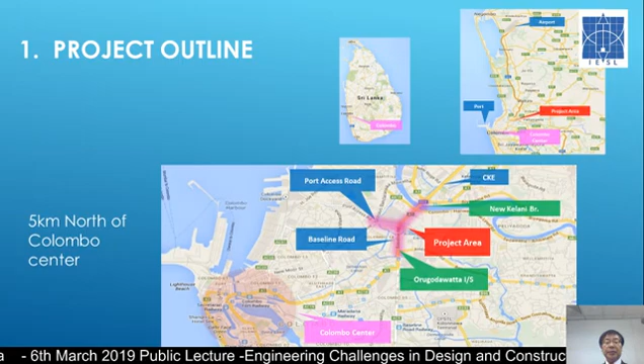The project outline, I don't think I need to explain in detail. It is about 5 kilometers north of Colombo Center. The bridge is crossing over the Kelani River. The baseline and port access road where our project is located has heavy traffic with 86,000 or 27,000 vehicles, especially after the opening of the Colombo-Katunayake Expressway between the airport and Colombo.

Further, as you may know, the port access elevated highway bridge, which connects from our project to the port, is now being implemented, and in addition, the extension from Orugodawatta to Rajagiriya and then to Battaramulla, finally connecting to the OCH, is proposed.

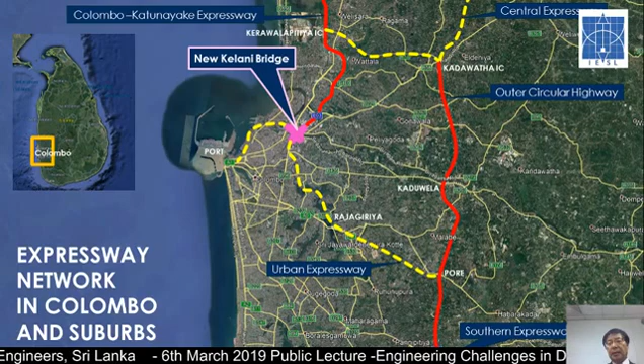So this is the expressway network. The pink one is our new Kelani Bridge project, and the red one is the expressway already in service, and the yellow one is under construction or under planning. Our project is located at the core of this connection point, which becomes a node of this expressway. This becomes a network when it is completed.

There are two packages for this project. The blue one shows package 1, which is mainly built for steel bridges, constructed over the existing bridges and existing road, over the baseline road as well as the port access road.

Whereas the red part, which is package 2, is parallel to the existing road connecting to the CKE. It's diverting from the CKE endpoint and connecting. In the middle there's a junction, a loop, that diverts the traffic to the port as well as to the baseline.

So this is package 1. It shows the number of piers. We have 70 steel piers and 28 concrete piers.

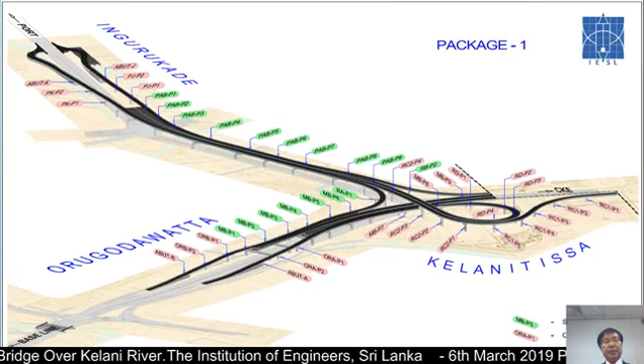As I mentioned, all the structures are built over the existing road, and those are made of steel. The reason we use steel is accelerated construction compared to concrete structures, because of the heavy traffic, we have to minimize the impact to the existing traffic. Steel erection is very fast and has less impact on existing road traffic.

Package 1 was awarded in December 2017 to the contractor JMT, standing for the JFE, Mitsui, and Toda JV. The construction period is 36 months, which contains fabrication of steel, erection of steel, as well as erection.

For package 2, as I said, it is parallel to the existing road, and is made of concrete, in contrast. At the center, you see the Extradosed bridge, a cable-supported structure being built in this country for the first time. On the right side, it connects to the CKE by pre-stressed concrete, post-tensioned box girders. On the left side, it is also made of steel-concrete, pre-stressed concrete bridges. Those are all box girders.

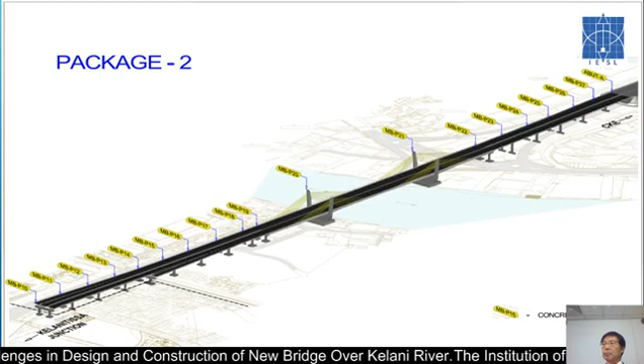This package is awarded to the SMCC Sanken JV. The construction period is almost similar to package 1, starting 2 months earlier, from October 2017 until 2020. It contains construction of concrete bridges as well as soft ground treatment for the bypass and connection parts.

Before going into the technical challenges, I would like to mention other difficulties that especially the PMU, or the RDA, was tackling and successfully solved. Relocation of residential houses, amounting to 377, were inside the right-of-way and had to be relocated, either to the Saramura housing area or through self-relocation.

Also, the Atomic Energy Board building, the NAITA building, was inside the junction area and had to be shifted or moved somewhere. Also, the high tension cables, overhead cables, pylons, piers and towers crossing our project area were a huge problem. But successfully, last month I think, all the cables and overhead cables were removed.

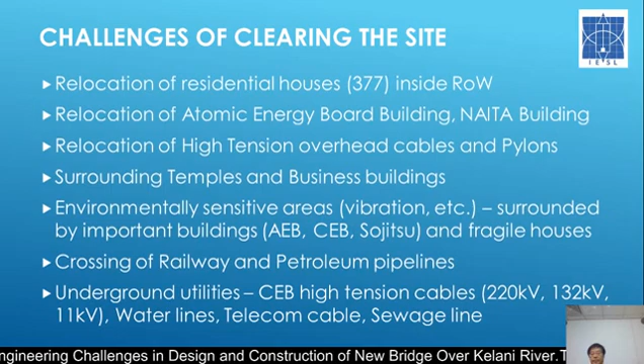However, in construction, the contractor has to excavate all the foundation areas manually as a pilot excavation to see whether utilities are there. There were many unknown utilities found, and they had to be relocated, which took a lot of time, not only for the contractor but the employer, asking the utility owners to shift or move them. Also, protection of the utilities is always mandatory, to not damage the utility lines.

Now going to the design. Since it is built in this country, the primary standard for the road is the RDA standard. Also, for structural design, Sri Lanka basically uses the British standard 5400. But those are not enough for designing the bridges, so we use several Japanese standards which are more applicable, and also American standards. So it's a combined use of different standards, but primarily the BS 5400 was used.

The design condition, briefly talking about this project: the design speed is 60 kilometers for the normal main line, but 40 kilometers for the ramp—ramp meaning a connecting road. We have to consider dead load, which is the self-weight of the structure, also the superimposed dead load, which is asphalt pavement and everything loaded after the bridge is connected. Live load is vehicle loading, composed of uniform loading as well as truck loading.

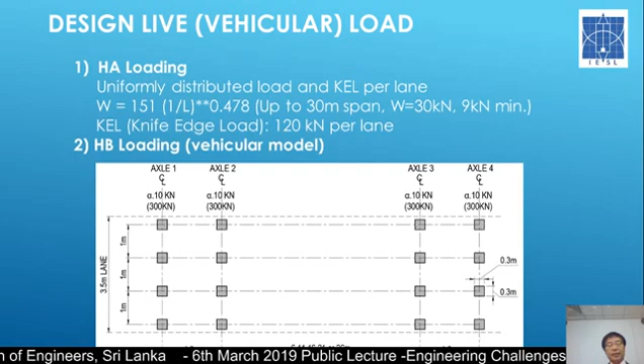The design live load - if you're a civil engineer, you might know there are two types of loading. HA loading, which is a uniform distributed load applied on the lane. But in addition, there is HB loading, which is like a truck - not exactly a truck, but a motor-like vehicle with 4 axles - so that truck load is also applied on the structures.

Now finished with the loads, and now I'm talking about the materials. Concrete - we have used up to 50 megapascal concrete, which is used for the PC pre-stressed post-tension girders, as well as pylons, where the forces and stresses are higher. But for the others, we use 40 megapascal concrete.

For cement, we use fly ash contained cement, which is low heat and also has long-term durability. We use the permanent fly ash contained cement. But we also use OPC, ordinary Portland cement, for the structure used for the superstructure.

Rebar, grade 460, maximum diameter 40 millimeters. Pre-stressing steel, which is Japanese standard, 15.2 millimeter 7-wire strand. Stay cables, which I'm going to discuss later, are a very high durable stay cable protected by epoxy.

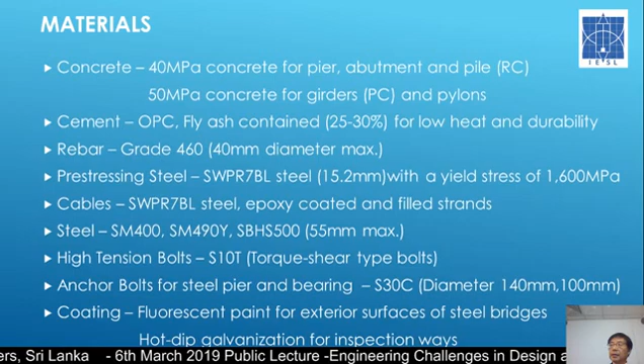For the steel used for the steel bridges, there are several kinds of steel, and the maximum thickness is 55 millimeters. The connection uses high tension bolts. And for the coating, as I said, this is a very high durable coating using fluorescent paint, and we also use hot dip galvanized for the miscellaneous structure.

Coating - there are coatings used for the exterior, interior, or the joint, depending on the location, so the coating system differs. But the most exterior surface, which has to be protected from the weather and atmosphere, uses what we call the C5 coating system, which again is being used for the first time in this country.

At the mill shop, for the plates, they have inorganic zinc primer, but at the fabricator's shop, they have first inorganic zinc paint, epoxy resin, and fluorine resin. The total thickness is 250 micrometers, which is 0.25 millimeters - quite thick.

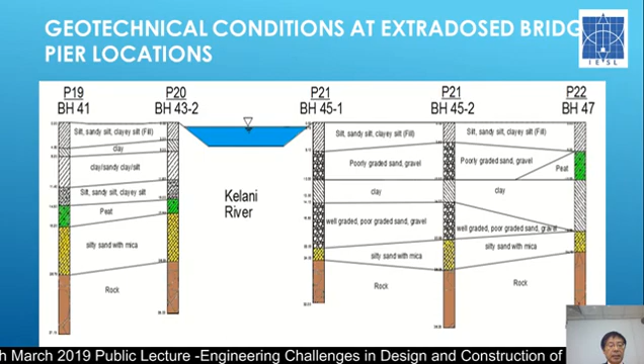Now for the geotechnical conditions - I think you already know that in this area there are some weak soils, so to speak, silt and also peat. In this picture, the green one and the yellow-green one represent peat, which is very soft and has high water content.

So for the foundation, we are driving into the rock. However, the rock has several degrees of weathering - 1, 2, 3, 4 - and so we are penetrating into the rock at least 1D diameter of the pile, checking the rock integrity. So the piles are all driven into the rock. The length of the piles depends on the site, but it is in the order of 20 to 25 meters, and bored piles are constructed to these depths.

Now for the main bridge - I will explain this later - the main bridge is an Extradosed bridge, built right next to the existing concrete bridge, spanning over the Kelani River. Both foundations are located outside the river.

This is a PC pre-stressed post-tension box girder, and the box girder is to be erected by scaffolding. The lengths of the box girders range from about 165 to 260 meters, all spans in a 4 or 6 span continuous bridge. The girder is made of units, either monocell or two-cell structures, depending on the width of the girder.

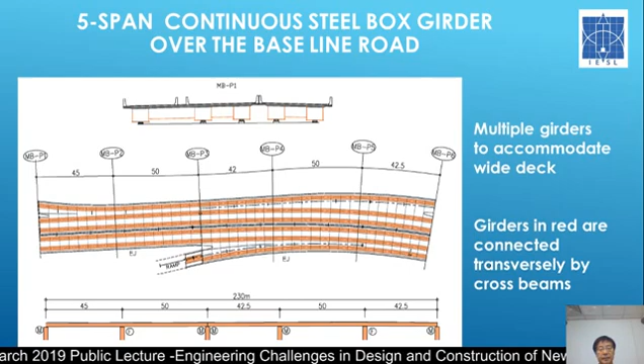Here we show that the red lines indicate the steel girders, and the multiple girders are connected to each other by the cross beam. Because of the width changes due to the connecting ramp, in order to accommodate the width, the number of girders varies.

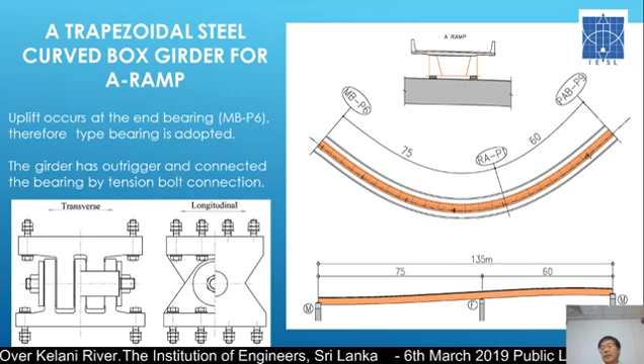And this is a curved bridge. We have a lot of curved bridges because of the ramp, and this is one of the sharpest curved bridges connecting between the main line.

So this is a 2-span bridge, and the span length is not symmetrical. Therefore, when the dead load, self weight, as well as live load is applied, the girder tries to rotate toward the outside, creating some uplifting, negative loading. So we used a special bearing, a pin type bearing, which has more resistivity to the uplifting.

Especially these portal frames sitting near the carriageway have the bottom part of the column covered and filled by concrete, to protect from any vehicular collision. It's because our structure is so close to the carriageway that a driver might collide with it. So that's considered in the design.

So the height is about 11 meters, and the width is 40 meters. It's such a huge structure.

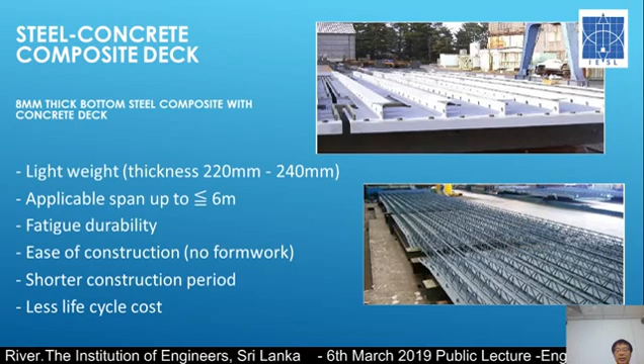The concrete is cast here and bonded, so the shear is taken by the shear studs as well as deformed sections. By using this composite deck instead of a reinforced concrete deck, we can reduce the thickness of the deck to 220, 240, and the applicable span can also be longer.

This steel structure requires no additional formwork, because this steel is used for the form as well as the permanent structure, and is very strong for cycle fatigue as well as construction.

For bearing, we are going to use a pot bearing, made of steel, instead of the rubber bearing used in some bridges in this country. We use this steel bearing, which has higher resistivity to deformation, and for corrosion protection we apply aluminum magnesium metallizing on top of the bearing, for longer durability.

Now this is the general overview. I'm going to go into a little more of the technical issues. The first is the design of the Extradosed bridge, which I think many people are interested in. So what is the Extradosed bridge, or what is Extradosed?

This bridge type was proposed by a French engineer in 1988. The girder is suspended by stay cables, but unlike a cable-stayed bridge, some of the load is also carried by the girder's stiffness. So it's a combination of a PC girder and a cable-stayed bridge.

You can see in the figures that the concrete girder has thickness higher at the pier, like a normal pre-stressed concrete continuous girder. But if we span a long distance, the girder depth becomes large and impacts the foundations. Therefore, we add some stay cables to help reduce the effect of the vertical load on the foundation.

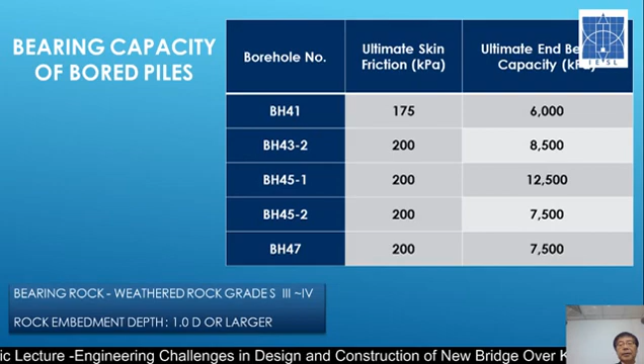Now, for the design of the pile foundations, which also carry heavy loads, the bearing capacity was determined for each location, considering end bearing as well as skin friction. But the majority of the load is carried by the end bearing, and the friction contribution is much less.

Going back again, what is an Extradosed bridge? As you know, there's the Extradosed bridge, cable-stayed bridge, and box girder bridge. If we adopt a box girder solution for this bridge, the girder depth at the pier is about 12 meters. Using the Extradosed bridge, that's reduced to about half, 5.6 meters. If you use a cable-stayed solution, the depth could be about 2 meters, but then you have a lot of expensive stay cables. So the Extradosed bridge is something in between the two.

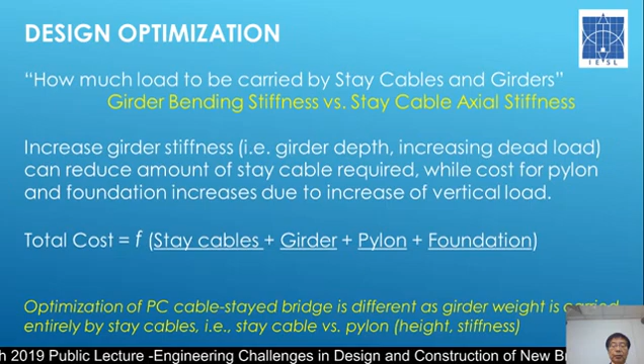Before we design, we did some design optimization. How much load should be carried by the girders versus by the stay cables should have some optimum. So we did a cost analysis. The total cost is a function of the cost of stay cables, cost of girder, cost of pylon, and cost of foundation. In our project, the cost of pylon and foundation were not much impacted, so we analyzed how much stiffness to give the girder and how many stay cables to use.

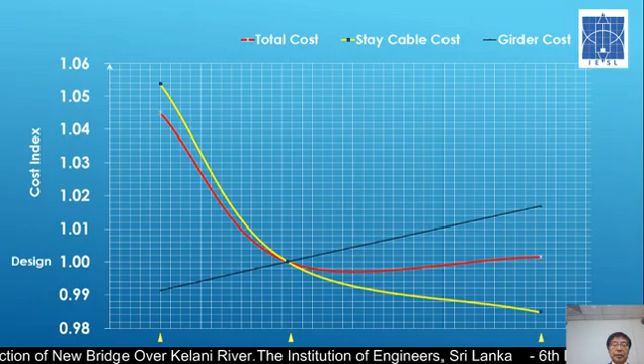This curve shows the cost index on the vertical direction and girder depth on the horizontal direction, with the optimum near the center. The yellow line shows the cost for the stay cable, and the black line is the cost for the girder. The total is the summation of those two, shown as the red line. The bottom of that red line is the optimum cost, which corresponds to a girder depth of about 3.3 meters. All the bridges we designed used this optimization approach.

Regarding loads and loading combinations, in addition to the usual loads, we consider creep and shrinkage of concrete, and differential settlement in case some foundations settle - about 10 millimeters relative to other piers. The deflection of the girder due to live load is also important, especially for fatigue. Sudden loss or replacement of cable, as well as replacement of bearings, is considered, along with temporary construction loads and stage construction. All these loads are combined with certain factors in the design.

In the design, we have two limit states: ultimate limit state and service limit state. The ultimate limit state is primarily to determine the strength design, whereas the service limit state is to consider serviceability.

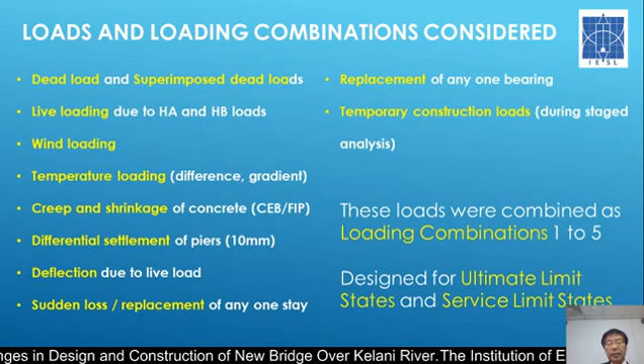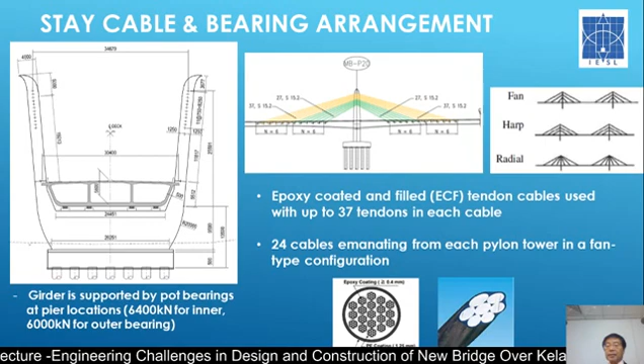For the stay cables, the alignment is very important. On the right hand side there are three types of cable alignment: fan type, harp type, and radial. The fan type cables are not parallel to each other, while the harp type is parallel. We use the fan type, which is normally used and more effective for cable efficiency. In the middle picture, the green and yellow-orange cables are aligned in a fan type, with the cable diameter depending on the forces applied.

On the left side, the cable is fixed to the pylons, and the pylon is inclined outwards, but this is purely for aesthetic reasons, not structural. The girders sit on the pylons by 4 bearings, and each support has a vertical reaction of about 6,000 kilonewton.

As I said, the cable consists of several strands, and the strands are encased by the polyethylene cable. But each strand on this one is what we call coated epoxy filled. So each strand, each wire, is coated with epoxy, and the void between the wires is also filled by epoxy. So there's no chance of water or moisture coming into this area, so the resistance to corrosion is high.

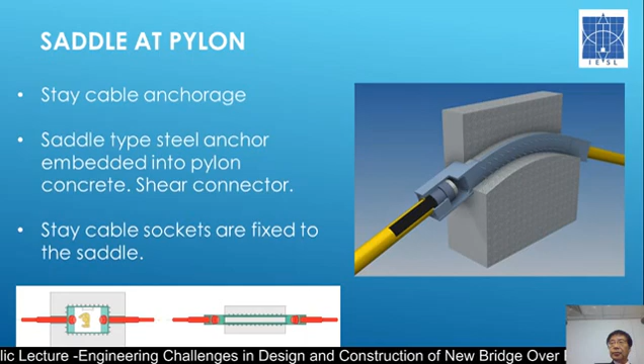The stay cable anchorage is also one of the design issues: how to fix the stay cables into the cable pylons. We adapted the system the contractor proposed, what we call the saddle, the blue part. Both ends of the stays are fixed to the saddle, so the tensions from the stay cables are transferred to the blue part of the saddle, and that blue part transfers the load to the concrete pylons by stud or direct bearing. So this is a saddle, and for each strand there's a saddle layer by layer.

The stay cables also need to resist fatigue, because of the number of loading cycles due to live load as well as wind. So in order to design the stay cables safely, we limit the stay cable stress level so that any number of cycles would not affect the fatigue. We call it the endurance limit, and the stress due to the amplitude is limited to 70 megapascal.

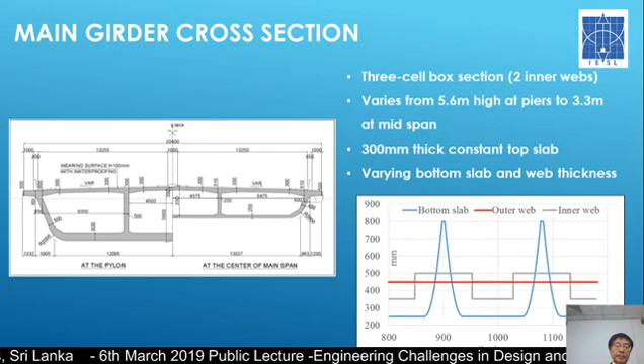Now we've finished about the stays. Now we are going to talk about the main girder. The main girder is composed of 3 cells, as you see in the sections. The left-hand side of the section is at the pylons, so the girder depth is deeper, whereas at the mid-span the girder depth is reduced like an ordinary continuous bridge. At the pylon, the depth is just 5.6 meters, but at the center, the depth is 3.3 meters.

Also, the thickness of each bottom slab or web is all changing, depending on the stress conditions. So the right hand side shows how the thickness of the box girder differs. At the pylon location, that's where the bottom slab reaches about 800 millimeters thickness.

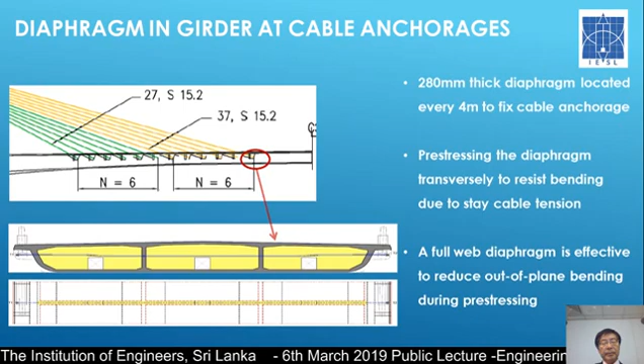Now, I have talked about the fixing of the cable to the pylon, but the other end also has to be fixed to the girder. So these stay cables are fixed to the girders, and as you see in the bottom picture, the stay cables are shown there. The stay cables are hanging the main girders, creating some positive bending. So in order to resist that tension due to this positive bending, pre-stressing cable is introduced. At this stay cable location, we have a yellow colored member that we call the diaphragm or the bulkhead, to keep the shape of the box girder.

How many minutes? Thank you.

For the design, we have some factors to consider, especially serviceability, because reinforced concrete theoretically has cracks, but we have to minimize or limit the crack width. In the BS 5400 standard, the allowable or permissible crack width is given, and we have used 0.25 millimeters width, which is allowable for the design. But for the pre-stressed concrete structure, for the girder, on the longitudinal girder, we use Class 2. This category allows some tension but the crack is not visible. So that is Class 2.

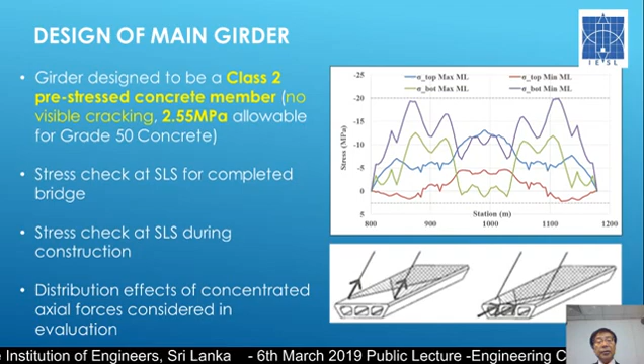For this Class 2, the permissible concrete tension is defined as 2.55 megapascal for grade 50 concrete. So the design has to ensure the tensile stress does not exceed 2.55. The right hand side chart shows the stress, and the bottom dotted line shows the 2.55. So all the stress is above that, meaning it's in the compression side, so there's no issue of cracking theoretically.

Maybe I will skip this one.

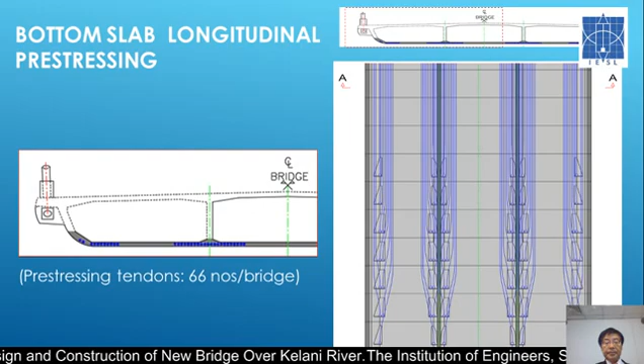The cable often vibrates due to wind or rain and wind, because stay cables have very low damping characteristics. In cable-stayed bridges and extradosed bridges, we consider two vibrations that might occur at the site: one is vortex-induced vibration, also called the Karman vortex, and the other is rain-and-wind-induced vibration, the combined effect of rain and wind.

Once again, the damping is very low. As I said, the logarithmic damping decrement is very low, around 0.01, so it is very easy to vibrate.

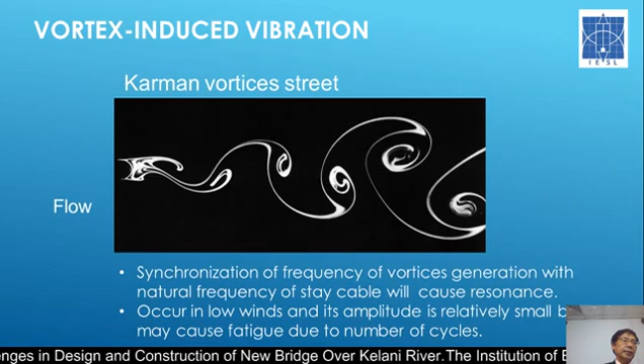This is the famous Karman vortex phenomenon. When wind acts on circular cables, vortices form in a staggering way, and when they come out with the same frequency as the structural natural frequency, resonance occurs and it vibrates. This often happens at very low wind speeds, like 5 to 10 meters per second, but the amplitude is very small and may not be a big safety issue.

But for rain-and-wind-induced vibration, when rain falls onto the cable, some water flows along it, which we call a rivulet. When wind acts on this, unlike the theoretically circular section, it becomes very unstable and creates an amplitude as high as 2 or 3 times the diameter. So it's quite a dangerous vibration, and we have to prevent this.

However, I think our bridge is not as long, so it may not be an issue. But as a precaution, we are going to study the vibration. Usually there are 3 methods to counter the vibrations.

First is changing the surface characteristics of the cable, so there's no uniform vortex shedding - often using a helical fin on top of the cable or some dimples for roughness. The second is giving some damping by installing a damper. The third is increasing the stiffness of the cable to raise its natural frequency, so there's no range where ordinary wind can excite it - if the stiffness is higher, the wind speed needed to vibrate it is much higher, so we can avoid that vibration.

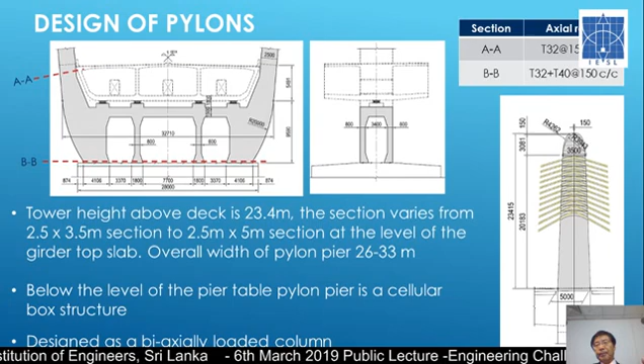Pylons. The pylon is basically designed for the compression force from all the cables as shown there. All the forces from the cables come into the pylon as a vertical load. Also, bending occurs due to the difference of cable forces on the left-hand side and right-hand side. So basically, the column is designed for bending and compression.

Foundation of the pylon: the pylon foundation is supported by 2-meter diameter cast-in-situ bored piles. I think a 2-meter diameter pile might be used for the first time in this country for this structure. The pile cap has 35 piles supporting each pylon, and the pile cap, which transmits the load, has a depth of 4 meters maximum.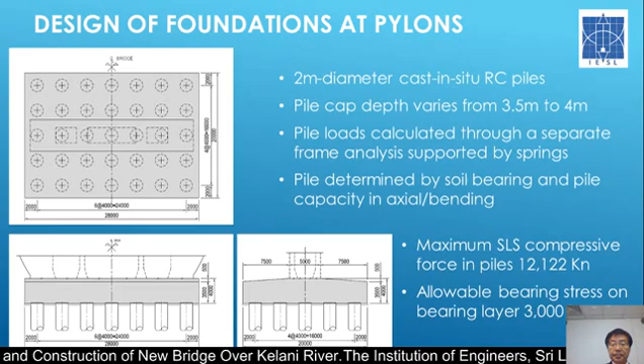Okay, now I've finished the design of the extradosed bridge, so I am going to move to a totally different topic. We have soft ground in our project area - I think you're familiar with the country's soft ground. As I said, peat and clay soils exist in the ground and need to be improved.

In our project, there are 3 areas that need improvement. First is the embankment at the merging point at CKE, where we are now doing improvement by paper drain or band drain with use of geotextiles. Second is a retaining wall and culvert - because of time constraints, we are going to use pile embankment, meaning driving small precast concrete piles. The third, which I'm going to talk about today, is the bypass embankment at CKE and the bypass for the CKE end sections, where we have adopted cement mix treatment.

The yellow marks the end point of the CKE end, and the left side is the Kelani River. Yellow is the existing CKE expressway, and in order to construct our bridge, we are constructing the bypass, colored red, along with the embankment.

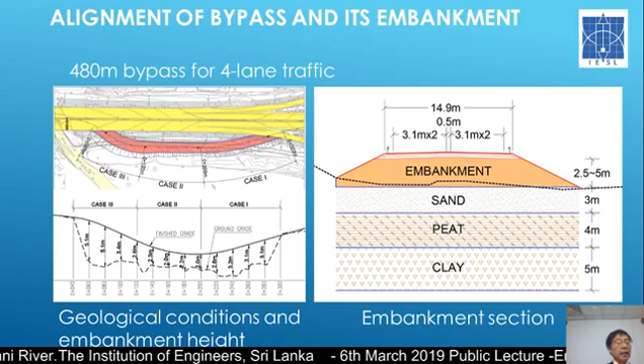This bypass carries 4 lanes, each lane width 3.1 meters. The embankment depth is 2.5 to 5 meters over the existing soil condition, with peat at 4 meters and clay at 5 meters. Both peat and clay are subject to consolidation or settlement.

So usually when we design for the embankment, we have two criteria: one is settlement, another is stability. For settlement, the residual settlement should be less than 150 millimeters over 3 years. In addition, for stability, slope stability and circular slip stability have to have sufficient safety factors: 1.2 for short-term, and 1.25 for long-term basis.

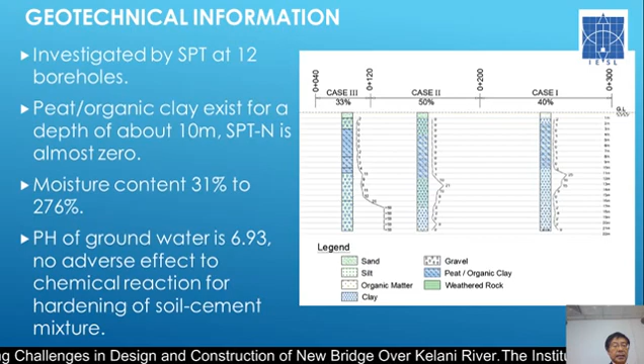Soil has to be investigated before the design. This area is very soft soil. We did 12 boreholes, and found that peat organic clay exists at a depth of about 10 meters. The N value by standard penetration is almost 0, and moisture content is as high as 276%, so it's like a water-like layer.

Before we determine the cement mix soil improvement plan, we studied several methods. The point is to have confidence in the reliability, but at the same time this bypass construction was introduced after the contract was made, so the contractor wishes it not to affect the entire construction. So short construction period is the highest priority, in addition to cost.

As you know, there are a number of soft-ground treatment methods like band drain, sand drain, pile embankment, and deep cement mixing. But we thought there should be a better method. For example, band drain and sand drain require 9 months only for consolidation, overloading, and preloading, so this cannot be applicable. Pile embankment driven into the soft soil is also costly. So the contractor proposed the cement mix method, which is reliable, rapid in construction, and economical.

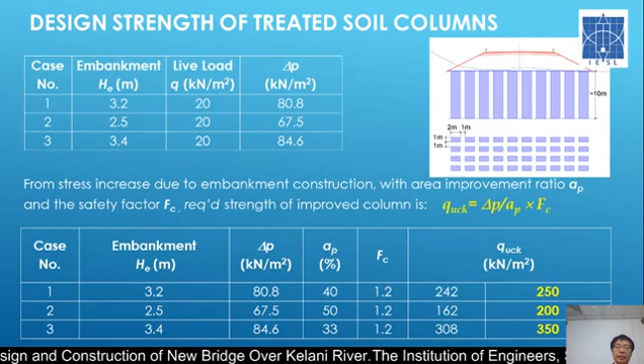For determining the soil improvement, on the right-hand side is a schematic drawing of the column - improved cement soil mix, a cement column laid like this. The column is 1 to 2 meters and built into the soft ground, and the spacing of the column is determined depending on the soil conditions and loading conditions. With all this, depending on the embankment height, we determined the required strength, and this depends on the locations.

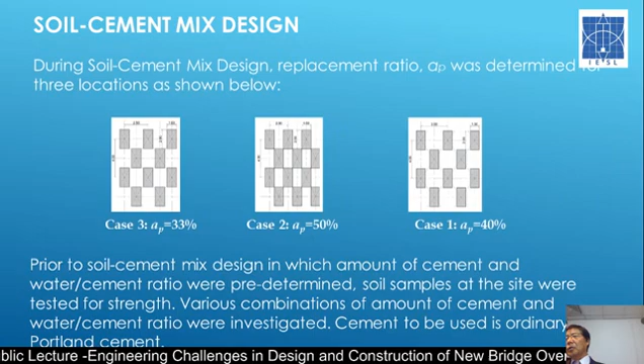For each location, we determine the layout of the column. Where the soil is stronger, you may not need as many columns. So we have 3 cases: Case 1 is 40% AP, Case 3 is 33%, and Case 2 is 50%, which means more densely placed. This is also part of the optimization, depending on the geotechnical condition as well as the surcharge load, and we determined these 3 types.

Before that, to determine the design - the amount of cement, water cement ratio, and cement ratio - we had to do some laboratory testing. We took soil from the actual site and used manual rotary mixing machines at the laboratory, then tested the improved soil by compression test, for 7 days or 28 days.

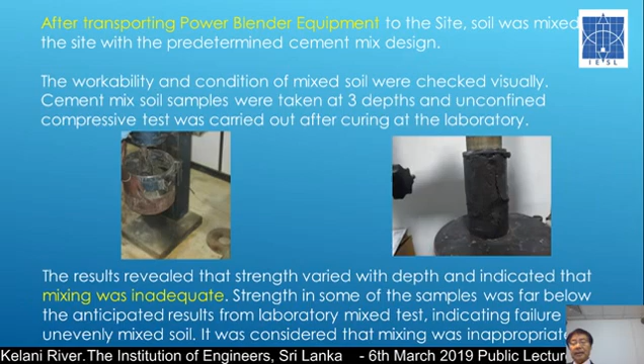So these are the failure results. The left-hand side is a mixture of the soil manually, and the right-hand side is a failure of the soil column. With this we had very good strength, but we found out later that mixing by this manual rotary machine is not representing the mixing at the actual site, which is not like this one. I will show you later.

So we brought the actual power blender machine to the site, took samples, and found that the strength could not be obtained as much as we expected. We found this is because rotating about 10 meters of soil uniformly is not achieved with a water cement ratio of 100%. So we increased the water to make the soil and cement more fluid, but more water reduces strength, so we had to adjust the cement ratio. We did a lot of exercises and finally got a good solution.

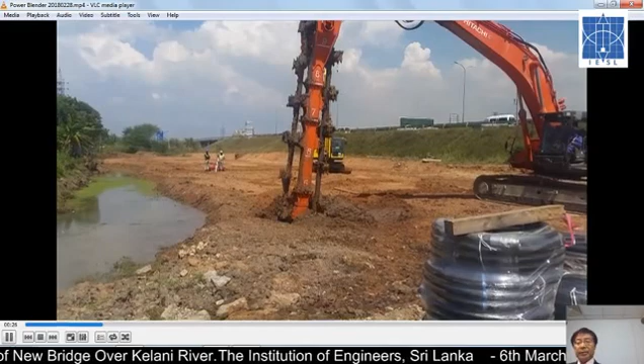This is a power blender - let me show you how it works. This is a trencher about 10 meters long that rotates and circulates, and at the center, at the tip of that trencher, cement mix penetrates into the soil. This rotates and mixes vertically, making a uniform soil cement column. But mixing uniformly for a depth of 10 meters is not as easy. Okay, let me stop here.

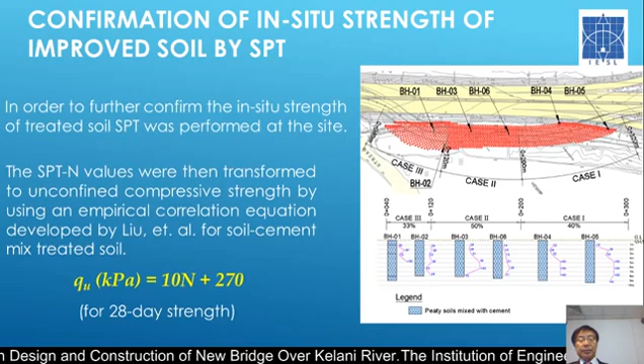After this operation, we checked the actual strength of the improved soil using the standard penetration test at the site, done at 3 locations. There is an equation to convert the N value to the uniaxial compression test strength, and that confirmed the strength is sufficient, much higher than expected.

Now we are talking about settlement issues. I would like to quickly go through that. Settlement is also estimated, but if we do not have any soil improvement, we expect the settlement to be as much as 1.5 meters. However, with stabilization, these are the calculations after improvement.

There is a good concept of how stress is shared by the improved column and the unimproved soil in between, called the stress sharing ratio, usually 15 or 20. Based on this, total settlement is estimated at about 23 to 11 centimeters, depending on the site.

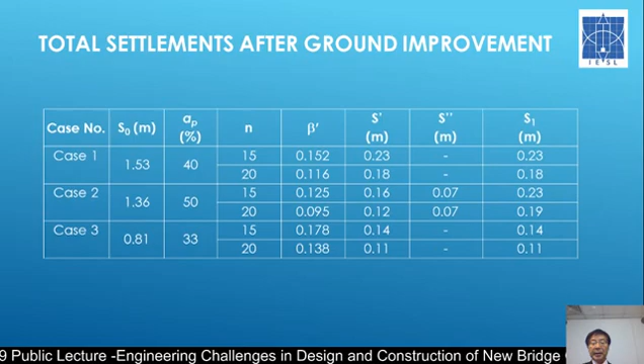That is the settlement expected. I will talk about the actual settlement at the site. Also, slope stability of the embankment was analyzed. Originally, the unimproved soil had a very low cohesion value, but after soil improvement with the columns, the C value increased about 10 times, and this is used in the analysis.

We also used a geotextile to transfer the load from the embankment to the bottom of the columns. The resulting safety factor is about 2 to 2.4, which satisfies the design conditions.

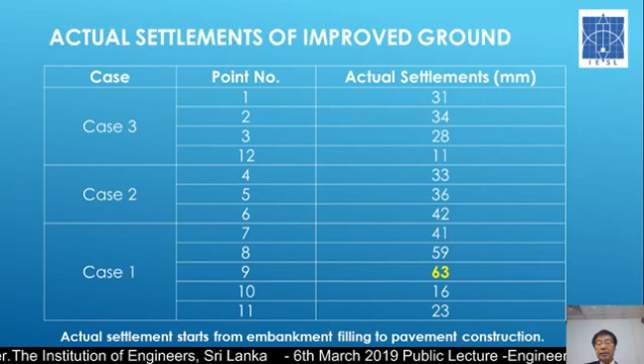Monitoring was done at 12 points for settlement, and horizontal settlement was also measured. The actual settlement from the start of the embankment to the end of the pavement is merely 63 millimeters, much smaller than expected. The bypass is already open to traffic, and there has been no settlement since opening.

How many more minutes? Okay.

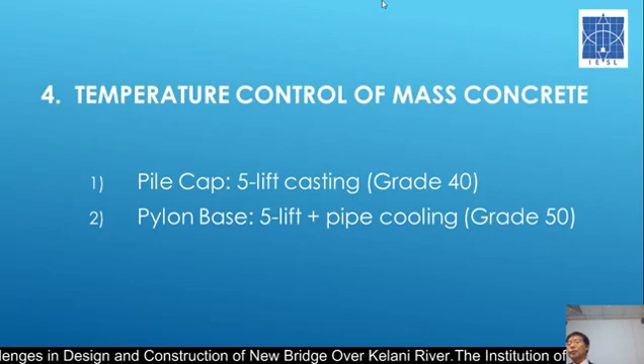Temperature control of mass concrete - now a totally different topic. Because this Extradosed bridge is a massive structure, we are very concerned about cracking due to hydration of the concrete. We have two items: the pile cap and pylon base. For the pile cap, we used grade 40 concrete, cast in several layers rather than all at once.

The second one is the pylon base. I don't think I will explain this in detail because of time. We used partial pipe cooling here, with concrete of grade 50.

Now, why do we need to control the temperature? It is to prevent thermal cracking. First, we control the maximum temperature occurring at the core of the structure. Second is temperature difference, between surface and core, which creates cracking. For maximum temperature, it should be less than about 75 degrees, to prevent delayed ettringite formation, DEF.

This cracking is a chemical action - when alkali, C3A, or SO3-containing cement is used and temperature is high during casting, then after the concrete hardens and water is added, the ettringite expands and causes cracking. This is very dangerous because the crack may appear not immediately after casting, but after a few years, sometimes 10 years. So this is a very important criteria we need to strictly follow.

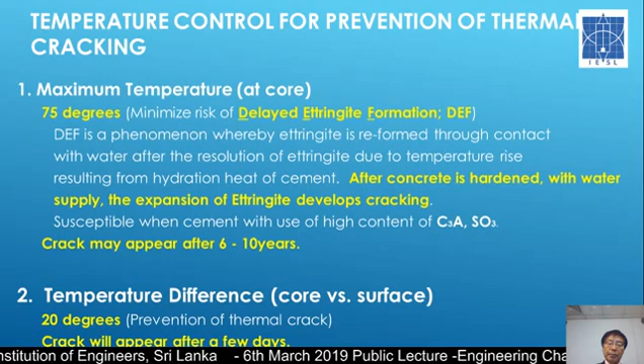Now, according to the permissible cracking in reinforced concrete, as I already mentioned, the allowable cracking width is determined by the British standard, and for severe environmental conditions it is defined as 0.25. But for very severe conditions, like seawater spray, applicable only to structures built adjacent to sea, it is 0.15. Obviously, more susceptibility to chloride in the airborne environment means the crack width has to be reduced.

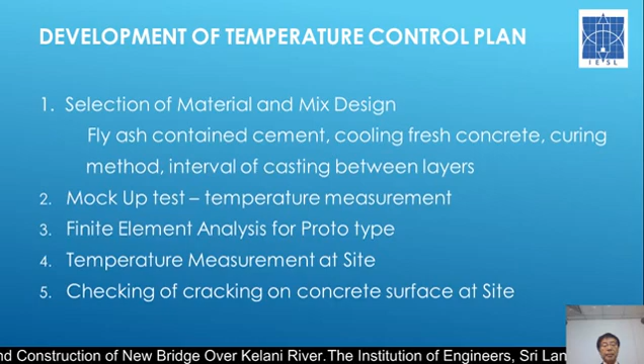So after selection of material and mix design, the mock-up test is done, with temperature measurement for the mock-up specimen. Thirdly, with that result, finite element heat analysis is done for the actual structure. With that, the concrete is cast for the pile cap, and temperature measurement was done at the site. Finally, after casting, the concrete surface should be checked for any harmful cracking, especially thermal cracking due to temperature difference. So mock-up test, analysis, and temperature measurement - all these are done.

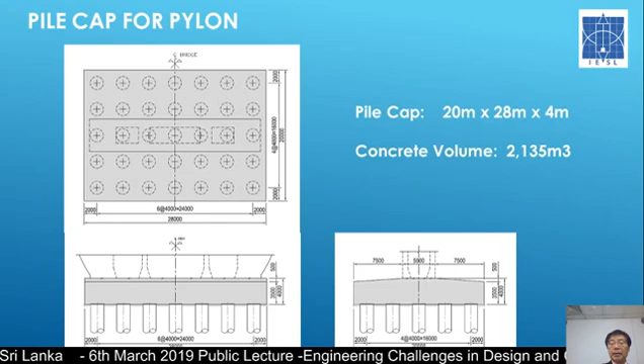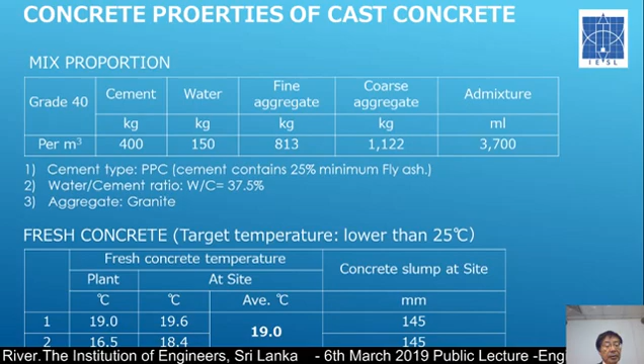Now for the fresh concrete used, see this table - the batching plant is 2-3 kilometers from the site. So when the concrete temperature is at stage 1 and 2, 19 degrees or 16.5 degrees, by use of a lot of ice chilled water. But at the site, the temperature rises only 0.5 or 1 degree, because it's so close. We considered the fresh concrete temperature to be around 25 degrees, but in this case we have even lower temperature.

This is a temperature history of the mock-up. There are a number of locations, but of course the center core has the highest temperature. In this case, the temperature only reaches about 65 degrees or so, far less than the maximum temperature of 75.

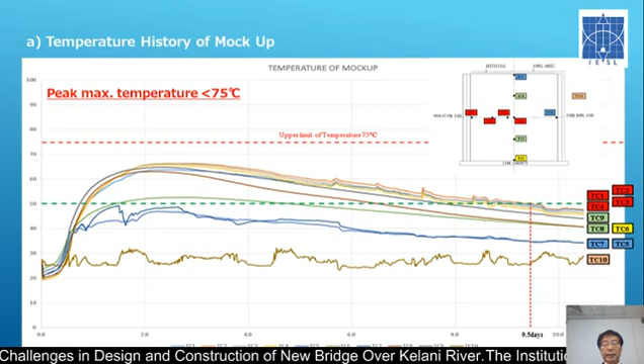But for the temperature difference in this specimen, there are 2 locations exceeding the requirement of 20 degrees. We observed that during curing the contractor sprayed cold water that made the surface cold, so the temperature difference becomes larger.

We consulted with the professor, and we stopped spraying cold water on top of the surface since it is not useful, because it makes a higher temperature difference. So we studied that controlling the temperature of the fresh concrete to be cast at the site is very important, at 25 degrees, then we can probably succeed at the actual construction. And for the temperature difference, we have to have more careful consideration of the curing. This is a sample analysis for the actual pile cap.

From this mock-up, we have taken all the data and adapted the key parameters used into this analysis. This is a 1/4 of the model and the 3D analysis.

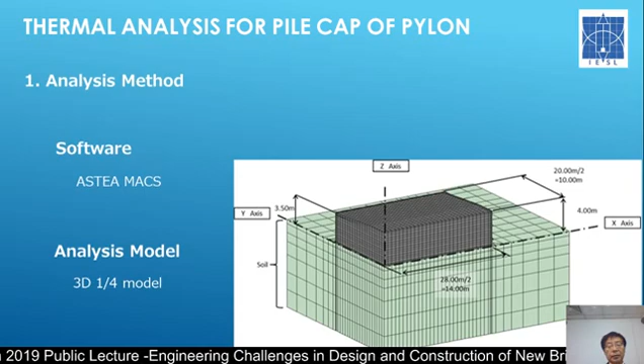The important thing we want to stress is that in the case of the 2 layer casting, the casting is done not only at night time but also at daytime, meaning the concrete temperature is going to be raised during the casting. But because lowering the casting temperature is most important, we consider it better to cast the concrete only at night time, within 8 hours. So we reduce the amount of concrete cast all at once to about 400 cubic meters.

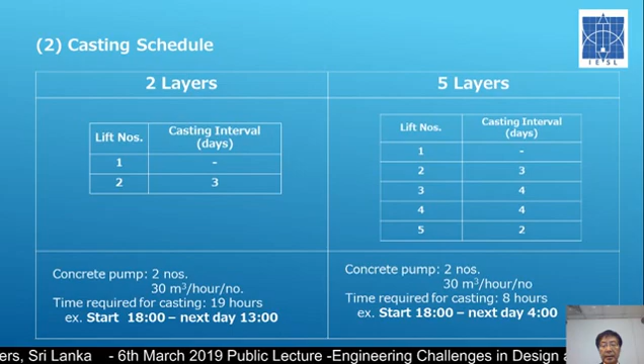So these 2 comparisons are theoretically done. For the 2 layers case, the first layer is cast, and after 3 days, the second layer. For the 5 layers, more time is required: first layer, 3 days after, second layer, 4 days after. Those elapsed times, the casting intervals, are determined so that the temperature is lowering after a few days, so that the total accumulation of temperature is not that high.

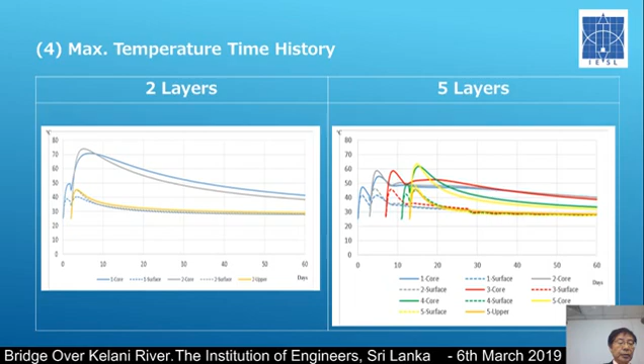So this is a history diagram of the temperature. On the left-hand side, you can see the top two, first layer and second layer, going close to 72 degrees. So the first layer is cast, and after 3 or 4 days the first layer concrete temperature lowers down. Then the second layer is added, and that gives heat to the first layer.

In the same way for 5 layers, you can see interesting curves where the first layer goes down, and the second one is added, then it goes up. Finally, a few days later, 10 or 20 days later, the entire concrete temperature lowers. So this is some accumulation of heat, interaction of heat between the layers.

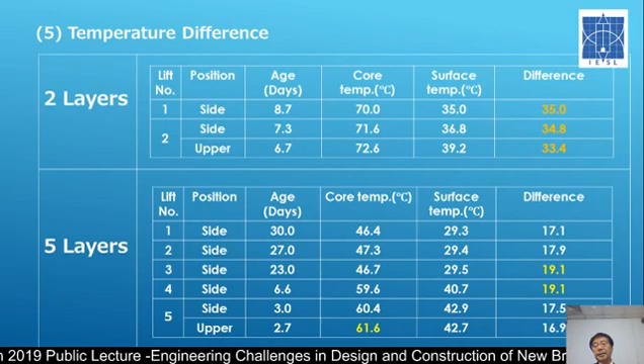So for the actual number of temperature for the second layer in the 2 layers option, the temperature difference is more than 35, which is higher and does not satisfy the requirement. But for the 5 layer case, the maximum temperature is 61, which is lower than 75 and 90, and the difference is lower than 20. Both satisfy the requirement.

So after that, we studied about the crack index. That is, when the temperature changes, there are tension stresses due to the temperature differences. So we studied this cracking index, and the 5 layer case has no theoretical cracking, but the 2 layer case might have some cracking.

For the 5 layer case, because of the multiple layers, you have to do some green cutting, and usually that is done by water jet, high pressure water jet, but it is very costly. It takes time, and the treatment of the water is not easy.

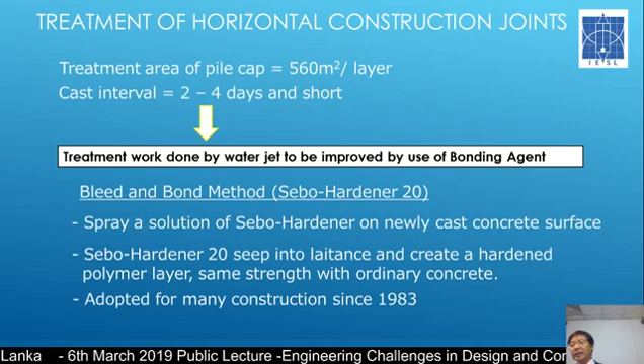So the contractor proposed the use of some bonding agent between the concrete layers, which is not about removing the laitance, but applying some adhesive liquid laid over the first layer, that suppresses bleeding and mixes to make a very hard layer of polymer. So this is used for this project.

So in order to improve this so that the joint would not be a weak point, we have done 3 tests.

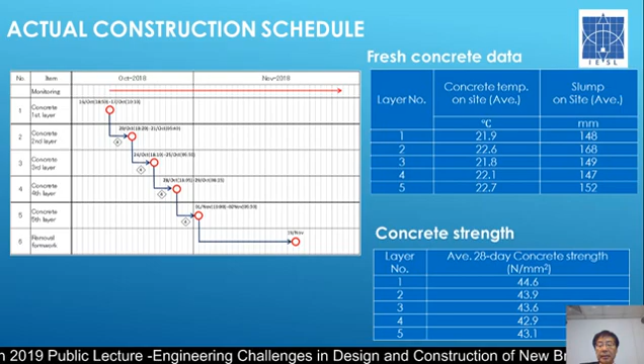This is the actual construction schedule. As I said, the first layer casting and then 4 days interval, and finish the concrete casting. The concrete temperature during casting is about 21, 22 degrees, less than the target temperature of 24.5 degrees.

This is a curve showing how the temperature changes. The blue line is the core temperature, and the orange one is the temperature at the surface. The dotted line shows the difference between the two.

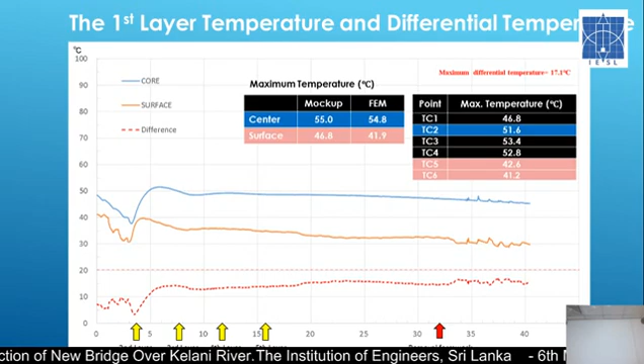When the first concrete is cast, the temperature drops a few days later, and then when the second layer is cast, you see the temperature rises again. But for the third layer, it seems not much impacted. It's a very interesting curve showing the accumulation of temperature from each layer.

I will show you the same curves, but due to time constraints I'll go through them quickly - same pattern for the second layer, third layer, fourth layer, fifth layer. Explaining each one in detail would take about 10 minutes.

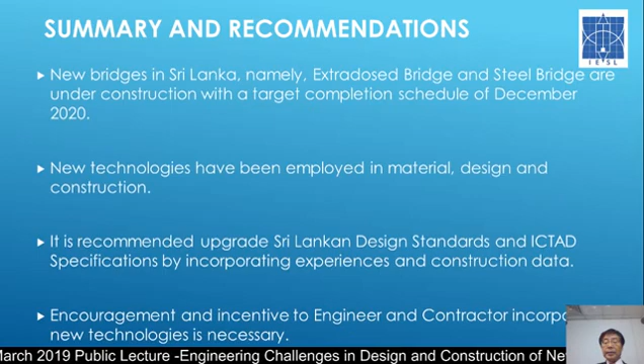I think that's all about my presentation. For the summary: the new bridge in Sri Lanka, named the Extradosed Bridge, and steel bridges are under construction with a target completion schedule of December 2020. New technologies have been employed in material design and construction. It is my view and recommendation that Sri Lanka design standards, or the ICTAD specifications we are using for this construction, should incorporate all the experiences and construction data we have accumulated. Encouragement and incentives for engineers and contractors to incorporate new technology are very, very welcome. So all these are my summary.

Now that's all about the technical part. From here I will show you some photos of how much we have completed the structures. As I said, it is almost 1 year and 2 months past, so the construction is rapidly in good progress.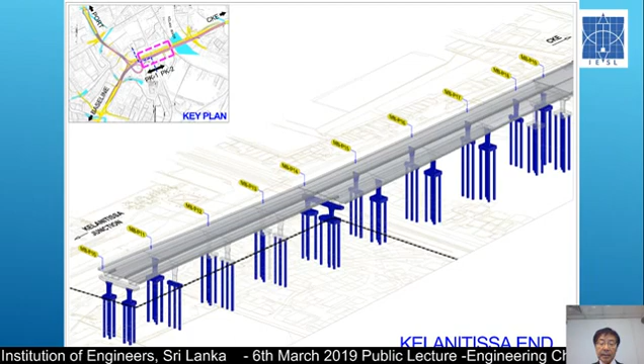This shows that the blue part is the completed part - I mean most of the piles are completed at the site, at Orugodawatta. This is also Ingurukade, where piling work still remains. This is at the Kelanitissa junction area, this is the Kelanitissa end, and this is the Extradosed Bridge.

This is the concrete for the pile cap, and now they've started casting for the bottom of the pylons - it's starting to build up. The piles construction is almost completed, and the bypass is also completed. So these are the progress photos.

This is at Orugodawatta, where both sides of the carriageway are being used and now under construction, with a lot of traffic diversion required to secure the working space. This is in the port access area, Ingurukade area, and the right hand side is the CEB.

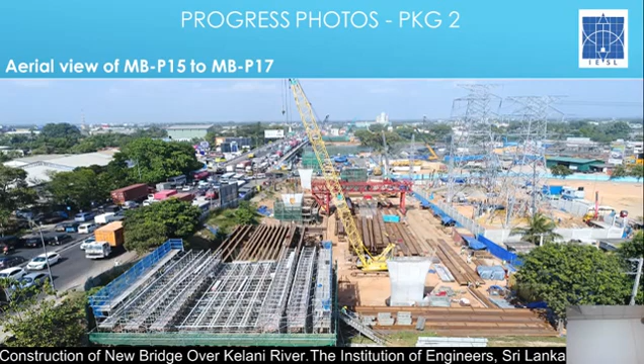This side is starting forming for the construction of the beam. These are also the construction at the site. You see the pylons are still CEB pylons - that is the new pylon after it, built by the CEB.

This is the construction area, showing the pylon foundation very close to the river. You can also see some concrete piers already built up.

This is the same area, and that one is a bypass. This is a concrete pier with a transverse beam, pre-stressed, post-tensioned.

This is a steel pier, which is fabricated in Japan, with a total weight of 260 tons. Each segment, about 30 to 50 tons, is disassembled and transported to Colombo.

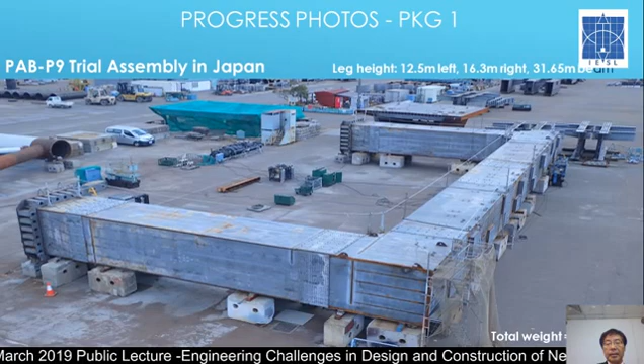This is a girder for the Ingurukade on-ramp, a trapezoidal girder about 165 meters long, pre-assembled at the shop. The dimensions and camber were all measured, and final inspection was made at the shop.

This is a bearing, as I said, the pot bearing, and the static loading test was done, vertical as well as horizontal.

This is a complete view by 3D. This is the Extradosed bridge, with cables in orange, yellow color. This is the junction area.

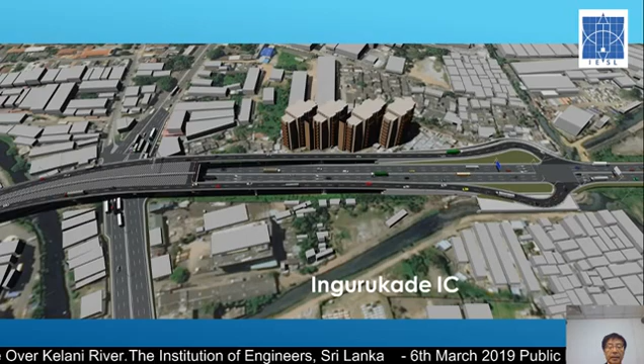This is from the existing road, looking at the elevated structure. This is the Orugodawatta junction interchange, and this is the Ingurukade IC. This is a night view of the Extradosed bridge.

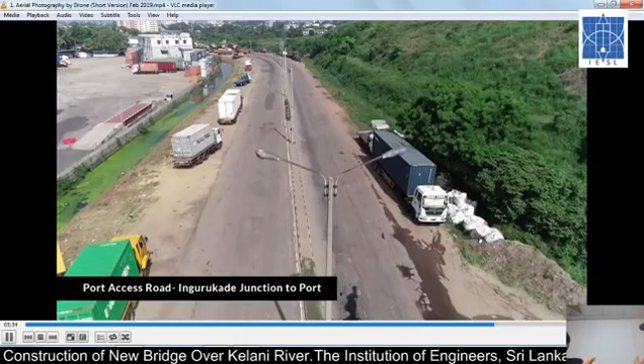But you see that a lot of traffic divergence, I didn't explain this on the video. This is the package 1 area that needs to have traffic diverged because the foundation area is also limited. So when we do the construction here, the traffic is moved to the other side, the construction is done, and then completed, then we have to move in.

Also, if we have a concrete construction, the pier is bigger, which means the size of the pier's foundation is bigger. So you have to consider how much these factors matter. But for this very congested area, if it is a local area, surely I think concrete will not be competitive.

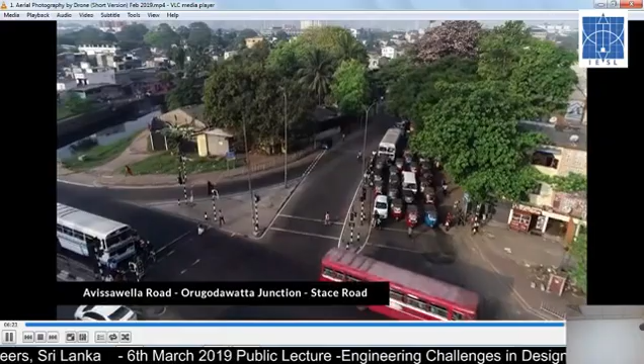But for the area we are facing, traffic every day, even now, there are a lot of difficulties actually. Also, the foundation being bigger may impact the location of the foundation, which has so many limitations with the utilities. We are constructing the foundation only 60 centimeters away from the utilities in some parts. And that utility is not a tiny utility, it is 220 kV or 132 kV, so there are two major utilities, and we have to build in between them.

So even with steel, there are a lot of difficulties in the foundation design, and if concrete is applied, I'm sure it would be even harder, and I'm not sure what the solution would be. The utility lines are not only in the carriage sidewalk, but also at the median. We have a CEB cable as well as a 700-millimeter sewage pipe. So there's nowhere that you can design around that. All this means it's not simple to say it's only about the cost.

Can I ask a correction question? From what you're saying, are these specifications and decisions documented for future review, and how did you arrive at these important decisions on whether to go for steel? Now you are explaining the justification for going with steel rather than concrete, which I agree with. I just want to know whether this has been documented for future reference, if someone needs it for maintenance.

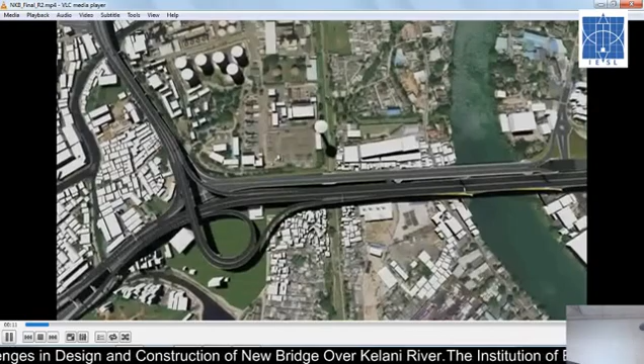Thank you for your presentation. I participated in one of the presentations during years also. My question is technical - how do you tackle with that in the pylon foundation, so that you have completing this done in several stages. And if you consider the shear transfer.

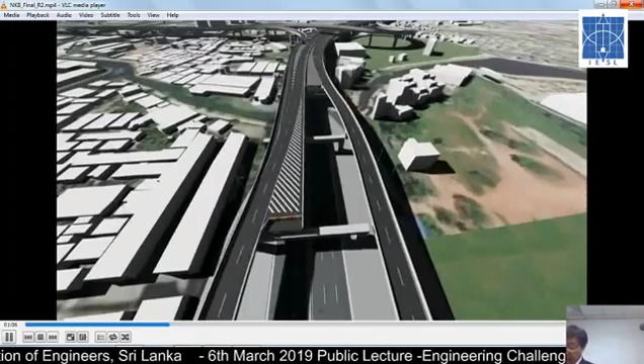How do you tackle with that shear transfer problem? You're talking about the shear force to the pile? Yeah, that's several stages of concreting, that is not monolithic concreting. Oh, you're talking about the pile cap. Yeah, pile cap, pylon foundation. Yeah, pile cap, you're talking about this one. Yeah, pile cap - it has to be considered, how do you tackle with that particular case solution? And the second question is regarding the temperature of the mass concrete. I saw that for the mock-up test you have used some insulation technique. Insulation technique to maintain the temperature difference, I think. How do you maintain the actual on-site insulation technique for surface, top and bottom?

Well, first the shear force - that is a thick 4-meter pile cap supported by the 2-meter pile, bored pile, spaced 3 meters apart. So it's very densely supported, so the pile cap is like a rigid body, although if you do analysis it's like a beam. So in the design we are designing that pile cap as a beam, which means there's a bending moment that creates a shear force. So that shear force is of course designed, and the stirrup is there in the design.

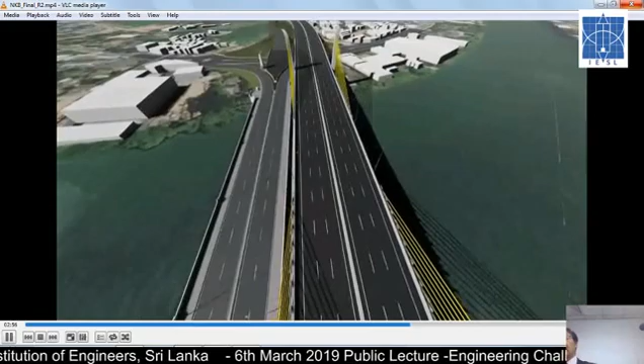For the construction joint, is that enough? And the second one, you're talking about the initial curing method - curing, but insulation has to be done to control the temperature difference. You mean the surface temperature control, the temperature difference? Yes, how to control? Well, actually we have used plywood for the side formwork, and also layer by layer, so without casting all at once, the temperature is lowered and adding that one, so it's also controlling the maximum temperature as well as the temperature difference.

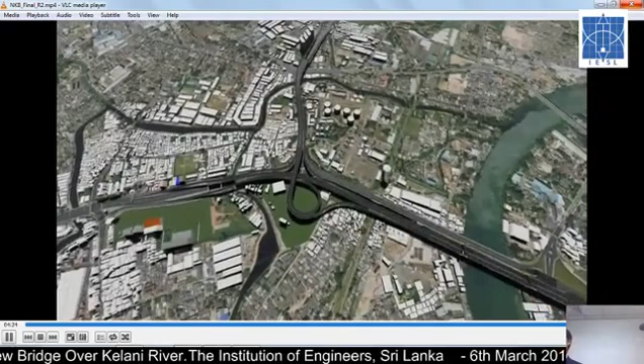So for the curing after casting it's plywood, which is used for most of the construction here, at the bottom and top. Bottom is casting on the ground, right, I mean after lean concrete, and the top there is a blue sheet tent, but it's casting layer by layer. As you see, all the history of the temperature within the mock-up and also the thermal analysis and the actual completed study made it possible to achieve the two requirements, the maximum as well as the temperature difference.

My question is on soil column. For the soil column, can you please explain the construction steps? What is the first step? There should be some method of construction for the soil columns. Soil columns - number of soil columns or the density? Construction method, soil column. Yeah, I think I showed that - yeah, you showed that this method, that mixing machine.

This is the tip of that. There is cement grout being injected. So this size is about 1 meter, this kind of - this is not one, it goes deep into 10 meter depth, rotating and pulling up, then the soil-cement mixed column is there. So one is here and the next column is here, will be here. So it's made like that.